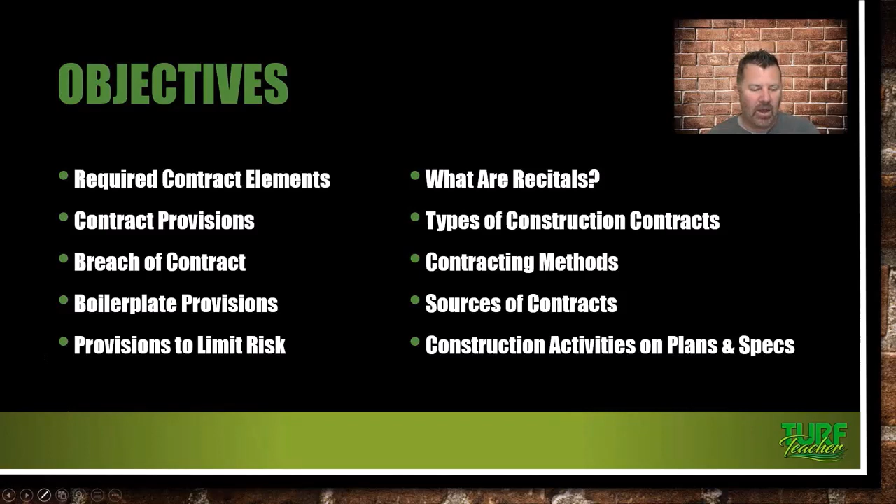I don't know, I guess they are doing it on purpose. Why is it that we always have to ask to see the specifications? Because there's kind of some hidden things that we may need to do in those specifications that we're not going to see on the plan. We'll talk more about that when we get to that slide.

We're going to talk about making changes to a contract, change orders, addendum, whatever it is. If the contract's been submitted and accepted, it's going to be a change order. And that's kind of a way where we can make a little extra money on a project, maybe, or maybe not—that's ethical.

But we can get hurt sometimes in some of these contracts, especially if you don't get specifications. So if you don't get a copy of the specifications and you leave something out, just wait for a change order, guys. I've even heard contractors say that's where they make their money, is on change orders—that is their profit. And so it's kind of sad, but it's the reality of doing commercial landscape installations.

What about resolving claims, alternative dispute resolutions, making substitutions? A lot of times the designer or the owner is going to make a substitution. They may change their mind, so it's going to be something very similar to what's on the plans and in the specs. And what about contract documents and then a project manual?

You need to make sure you've got that copy. And are oral agreements legally binding? I would never do a new job or work for a new customer without it being written.

If you listen to my radio show this morning - I know it's early January, and you might be listening to this lecture two years down the road, or listening to it for the current year to get your landscape contractor CEUs - we talked about contracts this morning and how one of our hosts on the radio show got really hurt in a contract.

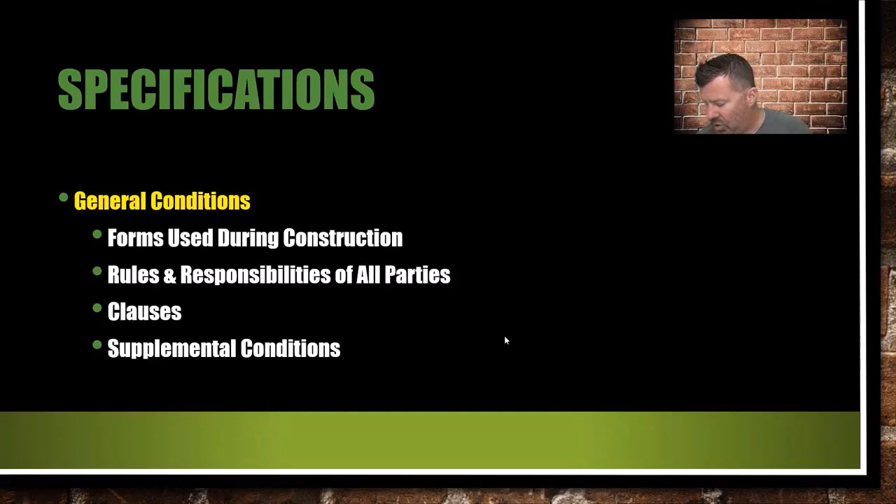Supplemental conditions are tailored specifically to each project. They may outline items such as specific insurance requirements, project procedures, and local law requirements - so a lot of information regarding that. Specific insurance you may have to have: you may only carry $1 million worth of general liability, and they may require $2 million, things of that nature. So you've got to read it and make sure you're able to provide that to the owners.

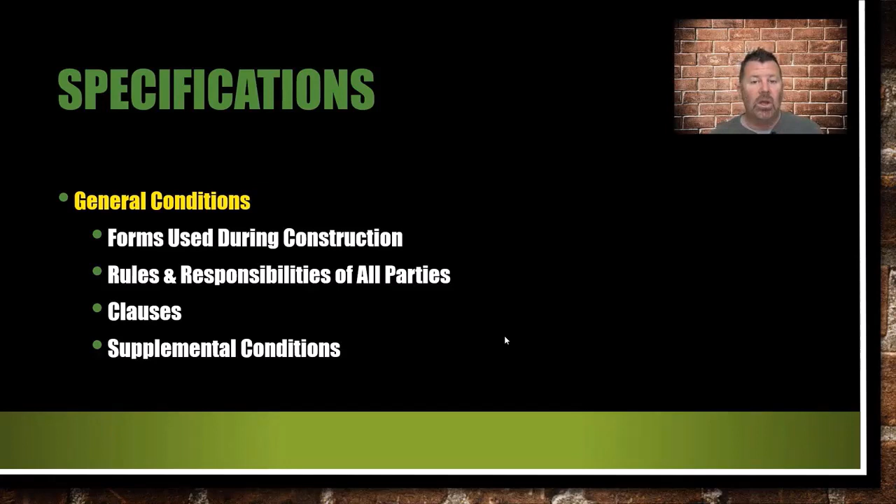Technical specs. Now, this is our work. This is what we do. It's going to describe the methods and materials and performance of the project components, and really this helps us do apples for apples.

I love it when a landscape architect specifies everything. We will use this. We will use Rainbird. We will use Hunter. We will use Techo-Bloc. We will use this brick paver. They're specifying exactly what to use. It's apples for apples. Usually non-landscape trades specifying products and installation will also be in the text.

So, under the electrical guys, they may say you need to use cast lighting. And so you need to check each one of those specifications. Everything is grouped by the trade, so we need to look for site work, we need to look for landscape, we need to look if there's an erosion section, we need to look for the electrical, and definitely the plumbing if we're doing the irrigation as well.

So get a copy of these specs and read them. You're going to have somebody on staff that's probably in your estimating system or estimating office. Hopefully you've got that system in place that can read these things and pinpoint things that are going to affect you on the construction site.

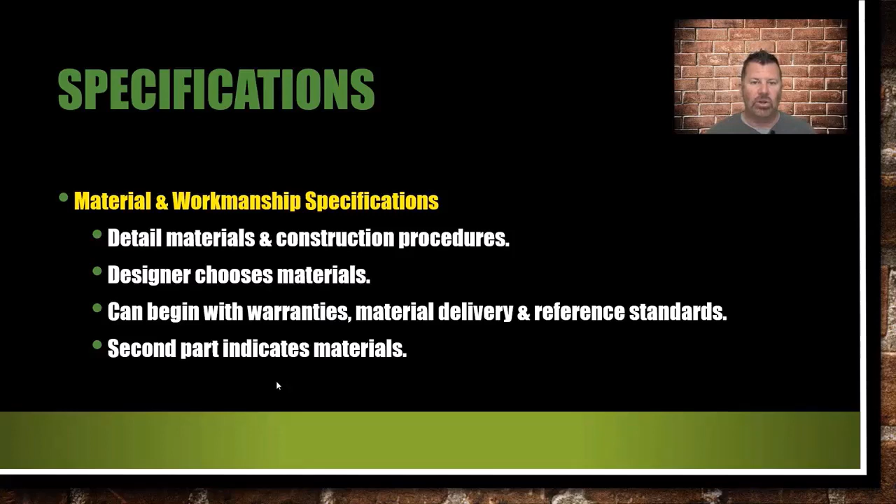Material and workmanship specifications detail materials and construction procedures. The designer will choose the materials - like I said, I love that, it's apples for apples. Can begin with warranties, material delivery, and reference standards. Then the second part indicates which materials to use. The description can be closed specs, which means no substitutions, and I love that.

Like I said, we're going to use all Hunter products on the job. We're going to use Schedule 40 piping. We're not going to have the choice of PR 200 or anything else. Everything is laid out to spec for us, and that allows us to bid properly. Because guys, what if it was open specs? This means the contractor can choose from a list or equal to clause.

I've actually seen it - a landscape contractor to supply an irrigation system to the project, and yes, you're going to have to hire a licensed irrigation contractor, or if you have your irrigation license, you can do it. But if they're not specifying what to use and you're set up to use Rainbird or Hunter or Toro, the three leading irrigation companies out there, and then you go to somebody that buys their stuff at the big box store, the lesser value, a lot cheaper. They're buying a $50 clock instead of a $300 clock. You get my drift? Apples to apples is what we want to bid on.

And if it's an open specification like that, these guys are going to bring some junk to the table. I mean, they really are. That's why I love the closed specs - the landscape architect has spec'd everything out. Last part describes detailed installation methods to be used. How are we going to build that job?

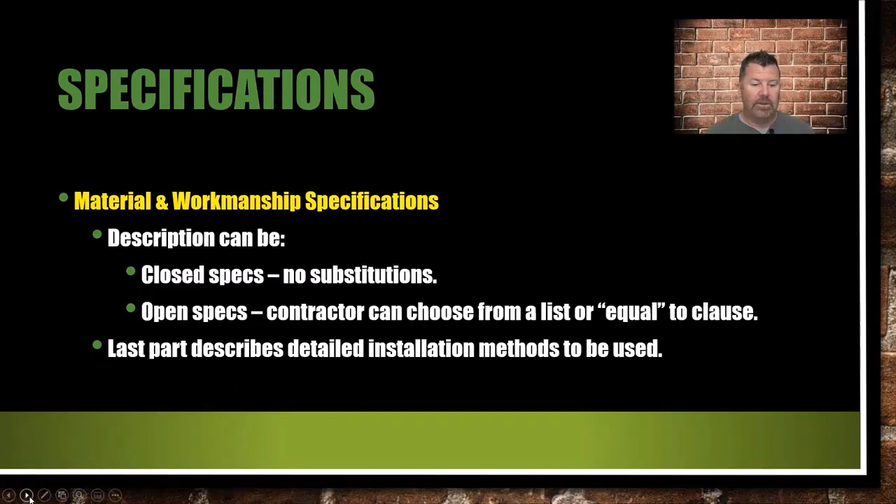All right, specifications - they prescribe the result of what a component of construction must attain. It must look and perform as the designer intended. And you're probably like, Eric, yes, but some of these designers don't know what they're talking about.

And guys, that's okay. It's okay to question them. It's okay to say, hey, I'm a licensed landscape contractor, I've been in business 30 years, I know for a fact that this plant right here will not grow in full sun. Why did you specify that, Mr. or Miss Landscape Architect, or Mr. or Mrs. Landscape Designer? Can you please tell me why? We'll put it there, but I'm going to put a clause in my contract to you that this plant will not work in this sun, in full sun. Therefore, we're not going to warranty it.

It's okay to question it, and it's okay to educate your client on it. You need to have some of these group discussions. A lot of times, maybe on these larger projects, you may not get a chance to talk to the owner, but you can at least talk to the site super, the GC, or the landscape architect. You need to bring these things to light, guys.

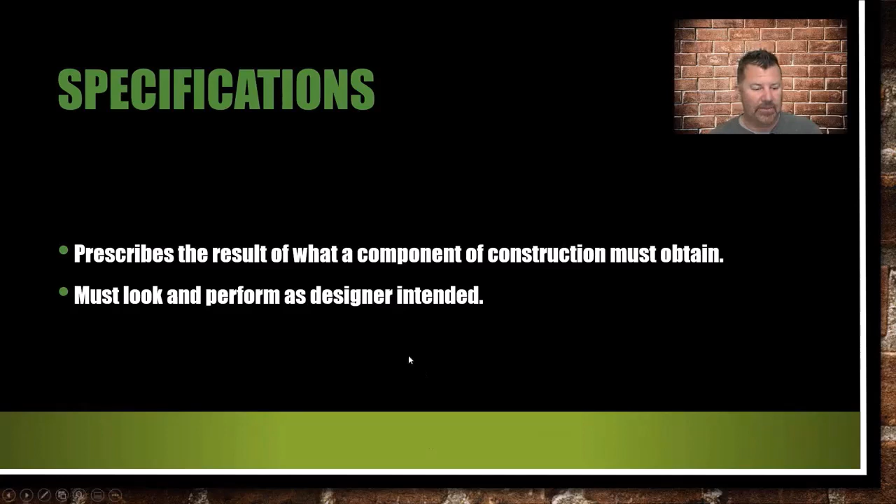Addenda is a change in the plans or specifications before the bids. So when you do bid on it, they're probably going to submit an addendum with you, so you can look at that from the original specifications and plans. A change order is once you've been awarded the contract and the owner wants to make a change, and there you can get some of your money back. Whether it's ethical or not, I've heard contractors say that's the only time they actually make money is on the change orders, because switching out a plant might be very expensive for some of these owners out there.

Construction drawings, you've got plans. They provide a graphic tool to you and to the owner, because a lot of times the owner doesn't really understand it, but the graphic tool is going to help them. It's also going to provide the location of the job, the actual grade of the property if there's a grading plan with it and they've had to change the topo, and then any improvements done to the property. A lot of times we're landscaping a new building or a new home, so those are the improvements, whether it be the plant material, the hardscapes, the pool, the irrigation system. All of that is an improvement to the property, and they are going to be on the plans.

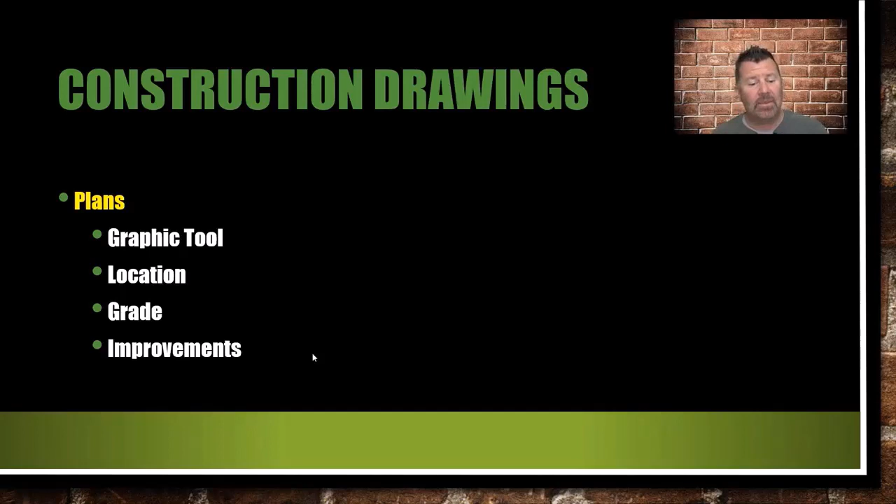I'm sure a lot of you guys already have your irrigation license, so you're doing both. We have both, and we do both. If we get the landscape job and there's irrigation on it, we're going to bid on that. There's maybe twice in my career we didn't have both, because you had to bid on them separately, and somebody came in a little bit cheaper on the irrigation system but we got the landscape job. It may even happen vice versa. So I don't know, but most of the time we're doing both the landscape and the irrigation, and so it's easy to do it.

Scale: architect scale is measured in fractional divisions, the engineer scale is in multiples of 10. Guys, this is kind of crazy - at the college, a lot of times my students are introduced to scales right off the bat in HOR 114 landscape construction, because we're measuring jobs, we're bidding jobs, and doing all that in our construction class. The scale is one of the hardest things for them to read. Guys, I have students come right out of high school, they can't read a tape measure. It's unbelievable. It happens, but we've just got to work with it. That's change, as they say.

But architect scale is fractional divisions, engineer scale is multiples of 10. Your surveyors and such are going to use the engineer scale. Landscape architects are going to use both. Building architects, pretty much everything is in architect scale because they're actually drawing floor plans and things of that nature. But you need to learn how to read both. And then use dimension lines over the scales - if you're looking at a landscape installation plan that's got dimension lines on it, use that versus the architect or engineer scale that's specifying in the legend. You would want to use the dimension lines.

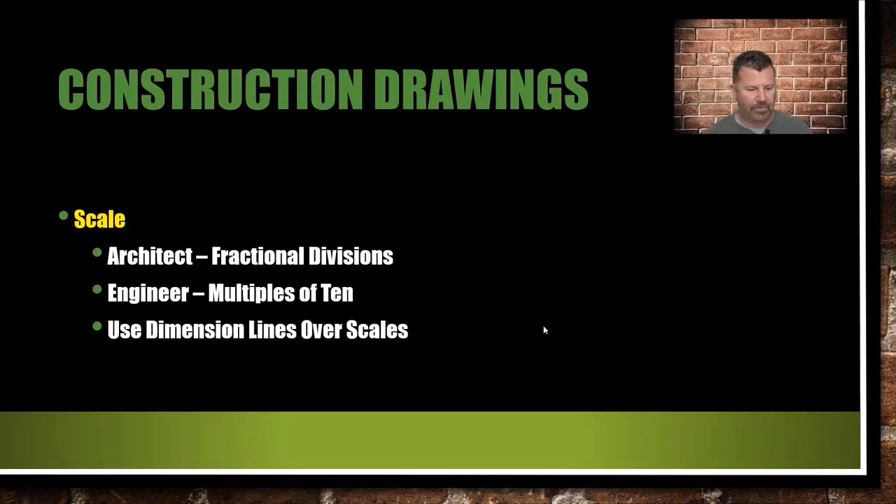Types of drawings: there's the plan view, which is length and width, two-dimensional, bird's eye view, you're looking across of it. Cross section is a vertical cut through, and that's going to show height, length, or width. And then we have an elevation - it's a vertical surface height with length or width. So kind of very similar drawings there. I love drawing them, I think they're good like on a streetscape if you're doing that to show the relevance of the height of the tree compared to the buildings, if you're responsible for designing a streetscape or something like that.

So funny thing is, everything's gone electronic. It's still fun to draw these plans by hand, guys, especially hand coloring or rendering the plans. But a lot of people are using AutoCAD, Revit. Revit is a big thing that landscape architects are using now.

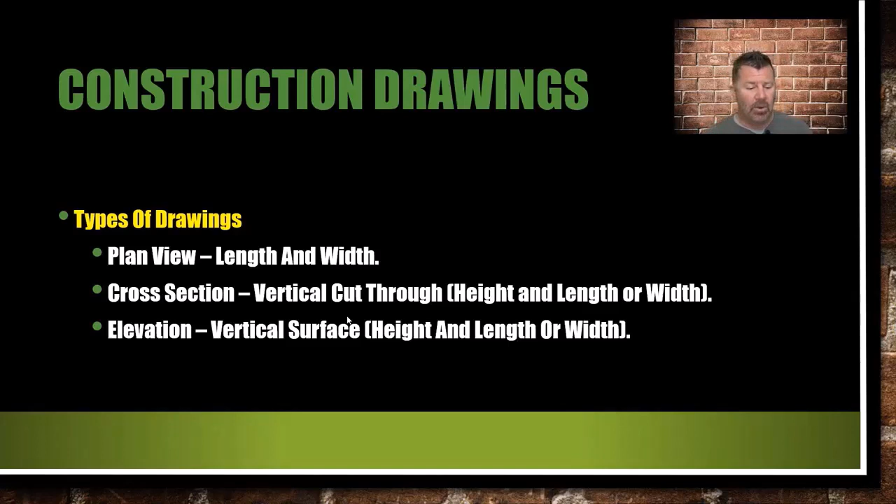It's kind of like a 3D walkthrough. It's pretty cool. That is the new wave, what you'd call it. We talked about it last year in the classes if you were in it. Oh my goodness, I'm ashamed to say I forgot. Virtual reality, the virtual reality of landscaping. So guys, it's pretty darn cool.

All right, line types on the plans. The darker lines are going to be your structures or your improvements, and the lighter lines would be those dimensions.

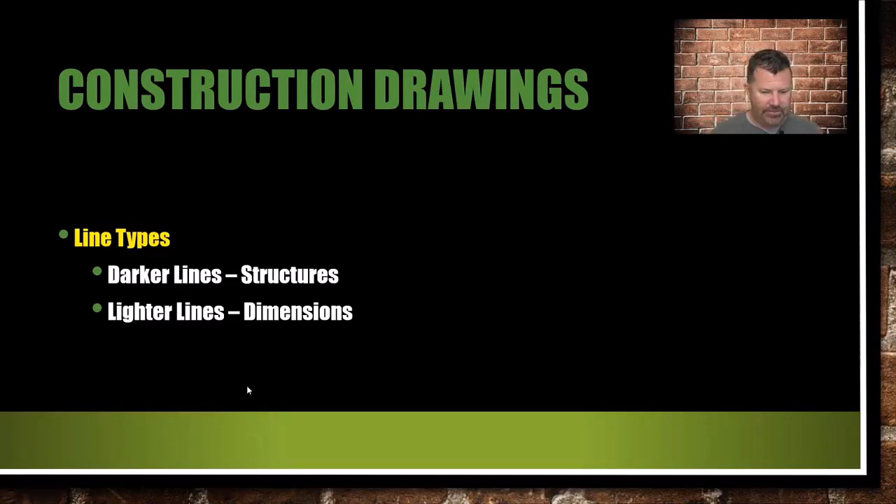A lot of people are doing them in CAD. I love Pro Landscape. I love Dynascape software. Dynascape's got a really nice tool where you can actually trace a property line and house and create the site plan that way, like if you were to take a picture of the plot plan that's in the construction job site box. It makes it real easy to do it. CAD can be printed out as a PDF or emailed as a PDF, so anybody can open it and zoom in on it. It's really cool to do that.

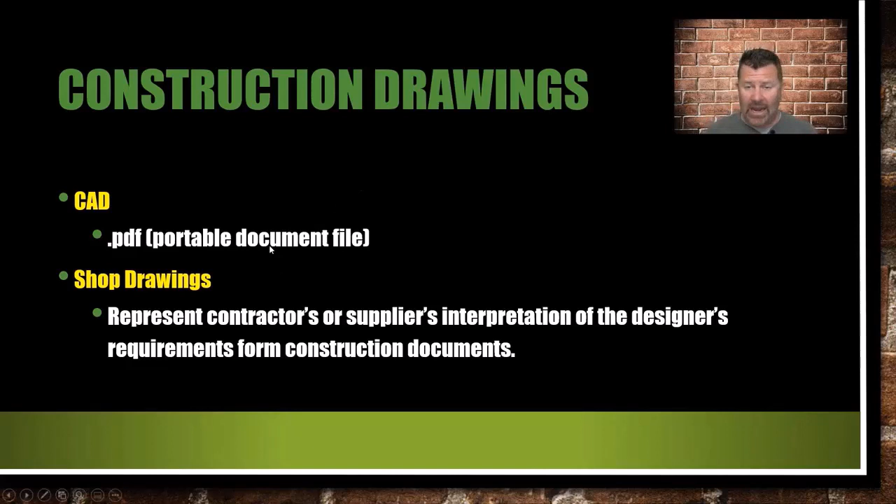Shop drawings represent the contractor's or supplier's interpretation of the designer's requirements from construction documents. Let's say the job has a nice big gazebo on a large commercial property that can sit several people underneath it, and there's a steel beam going across it to hold it up. The architect has designed it by looks, but they need to get that steel beam engineered. So these drawings would be sent off by the landscape contractor, the one putting it up or building it, or the GC, and they would get this spec'd, and then it would be approved by the designer. So you've got to have those shop drawings on certain things—not everything that we do, but every once in a while we'll have to.

As-built drawings, guys, we've got to do that on our irrigation systems. Even if there isn't an irrigation plan, I've seen it multiple times on the landscape design plan that the landscape contractor is responsible for the irrigation plan. So that's when we do an as-built, and that's required by law in North Carolina to do an as-built or record drawing for your homeowners or building owners, so they know where all the heads are, where the lines run, where the controller is. Everything needs to be on that plan.

It's simply taking that landscape design plan or planting plan and actually drawing it. You can draw it in different colors—main line in red for being hot, having water in it all the time, and blue for your lateral lines, or vice versa. We'd have to go back and look at the specifications from the irrigation board before we did that. But you need to know the difference between the main and the lateral lines, and mark the location of each head, and definitely the location of each valve.

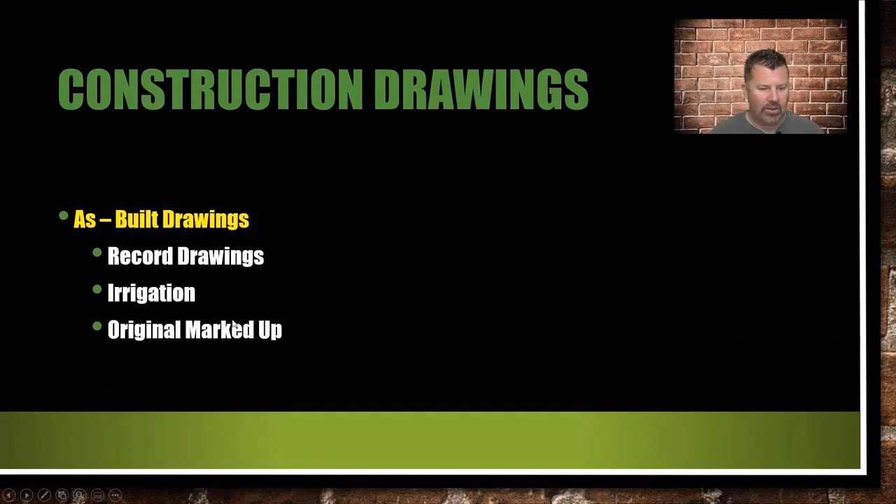The original marked up is good enough there. Site preparation or site demolition plan—there may be some things, guys, that we need to do as the landscape contractor. Maybe they're asking us to take down the old willow oak tree that's right in the middle of the property where the building was going. That's why we need to read our specs.

Site layout is when they're going to do the construction staking. Grid format, dimensions referenced from two baselines, and a baseline is a single reference line. We do a lot of that at school, pulling string lines and measuring off of a wall, off of a sidewalk—it's pretty cool. Object dimensioning is distance off a nearby object.

This is good to know if you're going to do a small residential landscape design for like a backyard or front yard. Those are my favorite projects, guys—you're in and you're out. You're doing a landscape renovation, it's good money, you're done. Customer's happy, you've got some pictures to put on a portfolio, and boom, there you go.

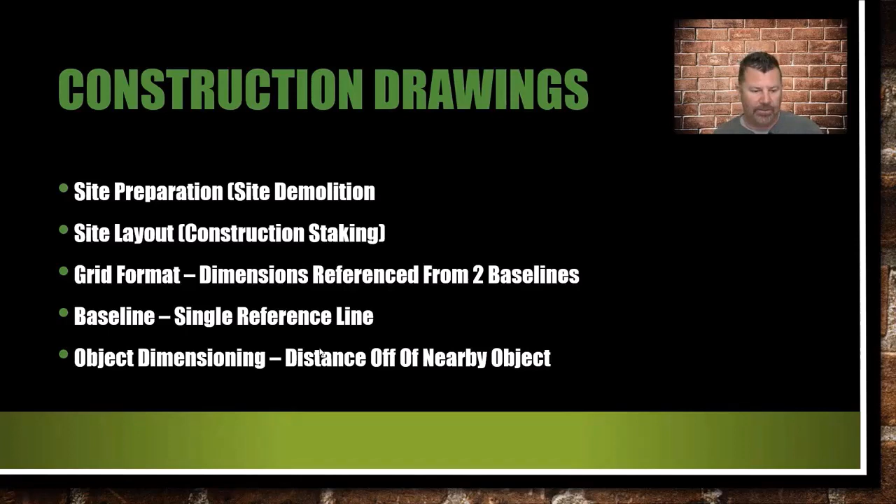All right, grading plans. Probably one of the hardest things to draw, one of the hardest things to do in the School of Landscape Architecture. We spent a whole semester grading plans, and it was still hard to do. It's one of the hardest things on the old LARE, the Landscape Architect Registration Examination.

Back in the day, yes, we actually had to do a grading plan by hand. Now it's all digital, multiple choice, where you're placing objects and actually grabbing a contour line and moving it around the house. It's a lot different than back in the old days.

A grading plan is based on a benchmark set elevation that serves as a reference point for all existing and proposed grades for the site, permanent location, and accessibility.

If you're good at grading plans, you're going to be busy. If you work for a landscape architect, or you've got a bachelor's of landscape architecture degree, you're going to be doing that if you're good at it. They're going to stick you over there on that CAD station and say 'do it,' because most LAs don't like doing it.

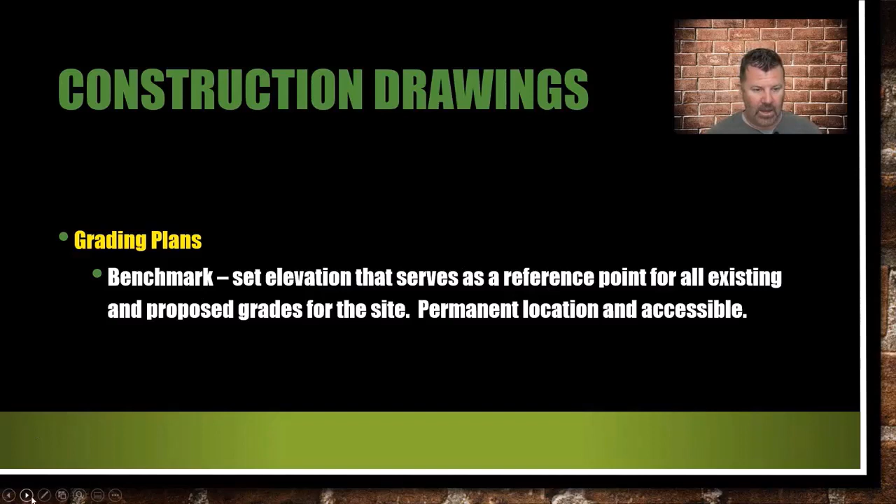I apologize if you keep hearing my computer, it's like it's resetting itself. I think I've got email open in the back, so that's what we're hearing. My apologies, I just don't want to stop the video for that. It's actually on a computer over there, and I've got the speakers turned up real loud.

In construction drawings, we have contour lines on these grading plans. The dashed lines are existing, and the solid lines are proposed. When you look at a topo map and you've got dashed lines going through the building, the architects place the building on the land, and they may have the landscape architect or civil engineer do the grading plan, taking those contour lines and moving around it. So the solid lines are the proposed ones for the site.

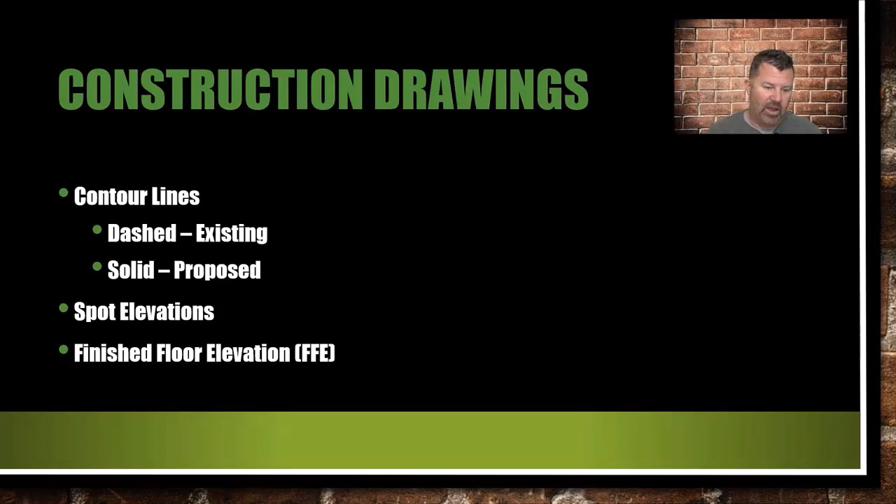Then there's the spot elevations, and the finished floor elevation. That concerns us when we're trying to make sure the water is flowing away from the building, and we don't want any water flowing back to our new structures based on something we've done, like with a berm, trees, or even mulch. Water's a big thing, and you don't want to have to go back and fix that.

There's utility plans - where are the utilities located, how are they coming into the house or building. More or less probably the building. Then the planting plans, what we're really concerned with, and then there's the plant schedule or plant list.

Now guys, there have been issues where I know from friends where they've only counted the plants that are in the plant list. So they look over there and see, you know, 10 Lagerstroemia indicas, 30 dwarf Burfords, 50 Indian hawthorns - back in the day, nobody's using Indian hawthorns anymore - but they just took the numbers right off the plant list, the schedule, and didn't go back and count.

Guys, I take a highlighter, and if it says 10 crepe myrtles, I'm going to highlight each one that I count. 1, 2, 3, 4, 5, 6, 7, 8, 9, 10. Highlight. Ooh, 11. There's an extra Lagerstroemia indica on the plan that's not listed in the plant schedule. Oops, you got to go back to the nursery and get one, don't you? Because the plan is what you got to go by, not the numbers in the schedule. They had a typo, they didn't count one themselves, so you got to do it.

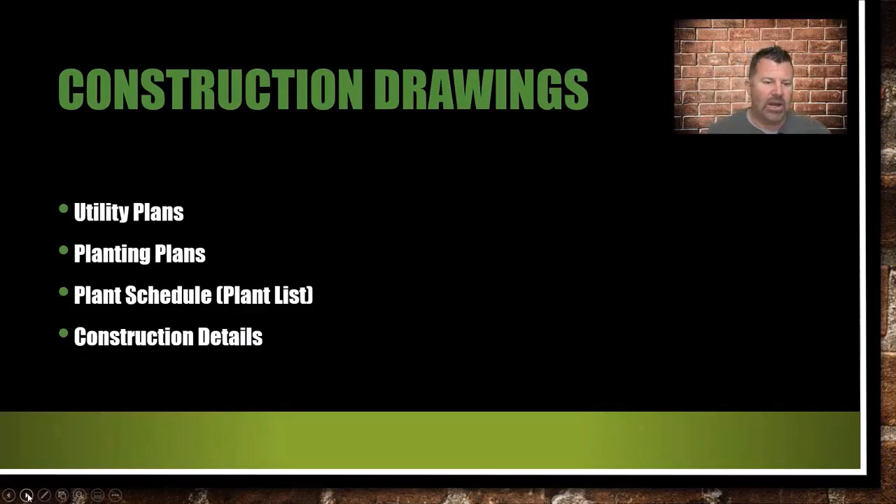And then construction details - like if you're going to build an arbor or pergola or anything like that for the homeowner or a commercial place, you've got to understand how to read those construction details. Contracts are legally binding agreements between two or more parties.

So there's one of your elements - it's got to have two or more parties. You can't go into a contract with yourself, right? You got to have two or more parties.

They will define the obligations of the agreement, outline the payment terms - hey guys, when are we going to get paid? And if you're hiring a subcontractor, you're going to have to tell them they're going to have to wait to go to Myrtle Beach next month, not on your dime this month. And then limit the liability of the parties involved. That's scary, limit the liability.

Well, everything's kind of geared to protect the consumer, right? Well, maybe so, but we've got to protect ourselves as well. That's why we got to make sure we read those contracts, and then include any provisions that we may want in them. The contract elements.

You have reached an agreement to do work for a customer. They've hired you, Mr. and Mrs. Smith have called, you are ready to work. But that does not mean you have a contract. There are four key elements that must be in effect to make the contract binding.

An offer and acceptance: hey, we will do this job for you for $15,000. Mr. and Mrs. say, okay, we accept that. Consideration: they're going to pay you, right? When are you going to get paid?

And then competent parties. Did you come to find out that Mr. and Mrs. Smith both had Alzheimer's? They didn't know what they were doing. And come to find out all of their finances are being handled by their children because they are coming down with dementia or whatever. Not a good thing, is it?

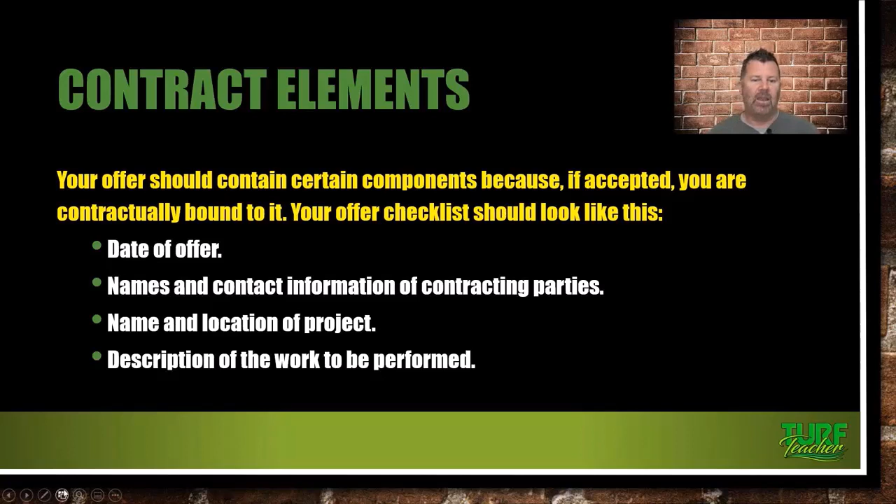The contract time or start and completion date, already mentioned that. The payment terms, when are you going to get paid, including progress payment schedule, and the final payment, and then conditions for scheduled delays. Guys, what if it rains for 2 weeks when you sign this contract and they're expecting it to get done in 3 weeks? You got 3 weeks of work to get done because you told them you could start next week, but then it rains for 2 weeks. You couldn't do the job. You got to have those conditions in there.

Contract documents with general conditions, the drawings and specs, contract sum, and expiration date of an offer. Now, again, you're going to have to design, like let's talk about that pool in the backyard again. You're going to probably have to come up and draw it. You need to let them see it. That's a design build contract. Let them see what it's going to look like. And if you got somebody on staff that can do the Revit, the 3D walkthrough, even with Dynascape software, gosh, what a good selling tool that is. You need to let them see it, and they need to approve that design. Can't go in there and just throw stuff in.

Consideration, both parties must give up something of value to have consideration. Competent parties, the parties in the agreement should have the legal capacity to enter the contract. And then a legal purpose. Contracts must be possible to perform, not intended to harm anyone and not require any illegal activity. They must be possible. I mean, sometimes, guys, they might be asking you something that can't be done. It has to have that legal purpose.

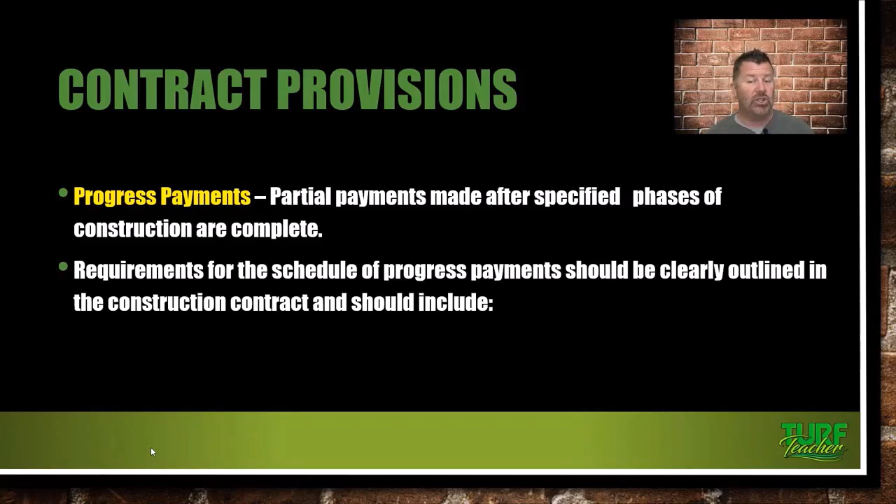So you gotta plan for your payment, which is kind of crazy, but that's the way it is. Payment terms: progress payments are partial payments made after specified phases of construction are complete. Requirements for the scheduled progress payment should be clearly outlined in the construction contract, including the number of payments, the amount of each payment, the stage of progress between payments, and the date or stage when each one is due.

So say you've got a month-long project. They're giving you a down payment to get started, and then in two weeks you're going to get another third of the total sum, since they give you a third down. Then after another two weeks you get another third, and when you complete it, the final third is given to you. The contract may also state what paperwork you need to submit in order to get paid.

This is probably one of the most important parts of the contract, guys, because you can't be expected to be paid when you ask for it. You're going to have to go through the necessary paperwork to get your hard-earned dollar. And if you're not ready to finance a project, you may not want to go into commercial landscape contracting yet.

Retainage is used by the owner to ensure completion of the construction project and provide protection against liens, claims, and default. So when you get that first progress payment, they're probably going to hold 10% back. Let's say you've got a $30,000 job. They give you $10,000 up front, then make a progress payment to you in two weeks, holding 10% of that $10,000. At the final payment, they'll probably do a walkthrough and then release it all back to you.

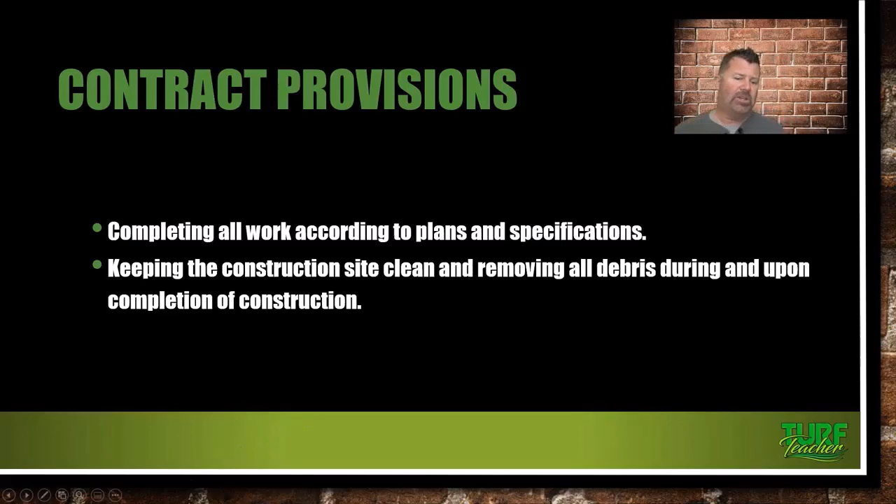Owner's obligation: ensuring prompt approval of all plans and specs. Yes, they've got to get this done in a timely manner. They must ensure the project meets the zoning requirements or specs. You know, you can't build a project—we'll use the example, what if it's zoned residential? Well, they can't put the commercial thing on there. What if you're going in to dig and pour footings? The owner has to make sure all this is right. It's not up to you.

And then issuing payments according to the specified progress payment schedule. So they're the ones kind of outlining when they're going to pay you. They got to pay you when they say they're going to pay you.

Paying for all required permits, assessments, and charges required by public agencies and utilities. Unfortunately, that's not always the case because you're going to have to purchase the landscape permit if that needs to be, and even the irrigation permit when they have to set the backflow and the second meter.

Furnishing all surveys and recording plats and a legal description of the property, and then providing access to the construction site in a timely manner. However, those specifications may say that the landscape contractor is to provide silt fencing around the entire property and install tree protection fencing and install riprap at the construction site driveway. That's why you need to read those specs, guys, because sometimes that is the landscape contractor's responsibility. They kind of sneak it in there and get you to do it free.

Breach of contract. A breach may occur when a party refuses to perform the contract, performs the act prohibited by the contract, and prevents the other party from performing its obligation. I kind of jumped the gun a while ago and jumped in on this a little bit right from the chapter. A material breach is a serious violation of the contract with liquidated or stated damages. And then immaterial or partial breach is a less serious violation that does not usually result in termination of the contract. They'll kind of slap you on the hand and say, just do your job.

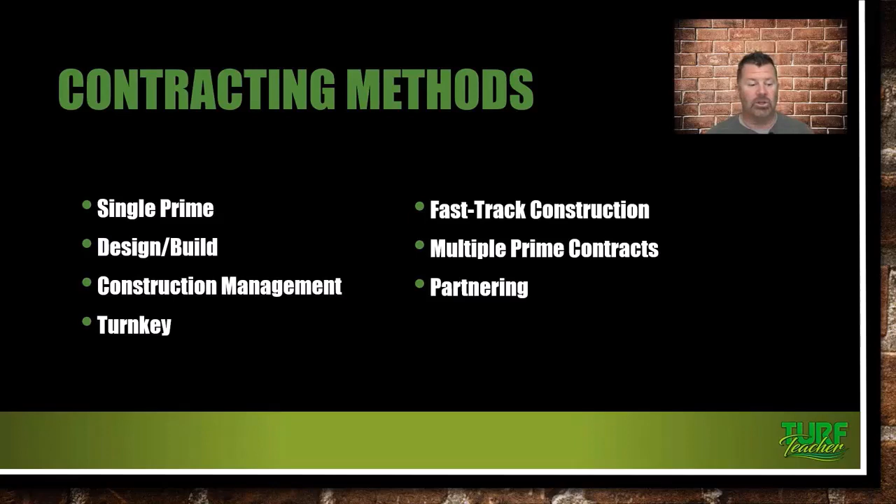Then there's design build, where you may have an architect on staff that you are doing the design and the build of the project. Then there's construction management, you're paid a flat fee to manage a project. Turnkey, you know, that's again all one price, here it is, here's the keys at the end. Fast track construction, get it done quick. And then partnering up, you may partner up with another builder who is really good with concrete, and you guys are really good with steel framing, and so you kind of partner to do a particular job.

Sources of contracts. In a situation where the form of the contract is not written by you, it is important to read the contract very carefully, highlight anything that is vaguely worded for further clarification, and then make any necessary additions.

In situations where the contract was not written by you, review the changes with the other party. Make sure any requested changes have been added prior to signing, and then review the contract again prior to signing.

A change order is a written agreement between the owner and the contractor to change the contract. Common reasons for a change order: change in scope, unforeseen site conditions that differ from expected, and errors or omissions in construction plans or specifications.

The claims resolution process provides a way for the owner and contractor to resolve disputes about additional amounts owed as a result of contract changes. The claims procedure: the contract may stipulate specific procedures for handling claims, and the project schedule. The project cannot be delayed during the claims resolution process.

Dispute resolution options include negotiation, where you just talk about it, mediation, where you have somebody come in and mediate it, and collaborative law or arbitration, which are probably not what you want to do.

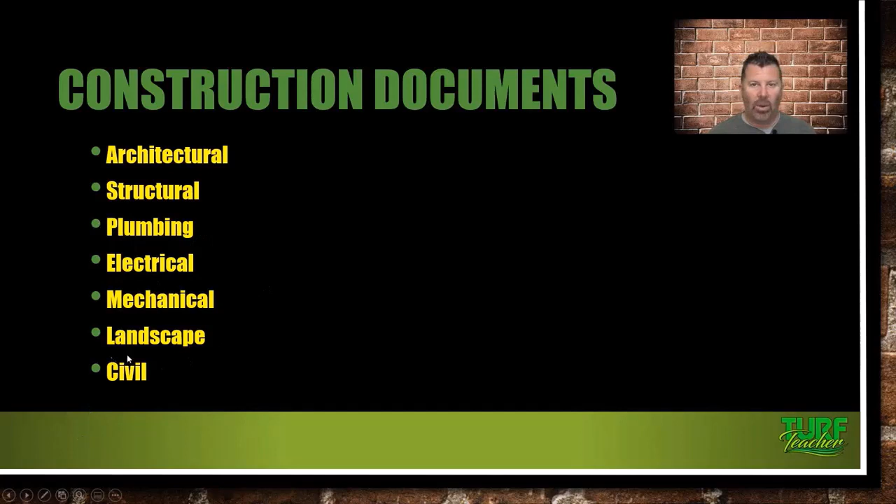Under most circumstances, oral agreements are just as binding as written agreements, with a few exceptions. Oral agreements are not a good way to do business, get it in writing. Guys, the only time you're going to do this is if you've worked for the homeowner for 30 years and you've just got that respect.

For example, 'Hey Eric, we want you to do this, just go ahead and do it, you've been with us 30 years, we trust you, do us right.' You've got that bond with them, so it's okay to do it then. That's a matter of legal interpretation.

Clarity of language and meaning is one of the most important aspects of interpreting contracts and avoiding a dispute. It is strongly recommended that you use an attorney when drafting contracts to ensure the contract will stand up in a dispute. They can probably get you a generic one that you can change, like where the project's at, the amount, and stuff like that. But if you've got certain things that you have to have in your contract, just pay your attorney to do it. Spend the money and protect yourself down the road. I know a landscape contractor that's got an attorney on staff to make sure all their contracts are written correctly. That's pretty cool.

Subcontracts should include similar content as the owner contractor contract, such as date, names, and contact information of the parties, name and location of the project, description of the work to be performed, and subcontract type or start and completion date. You got to have that start date.